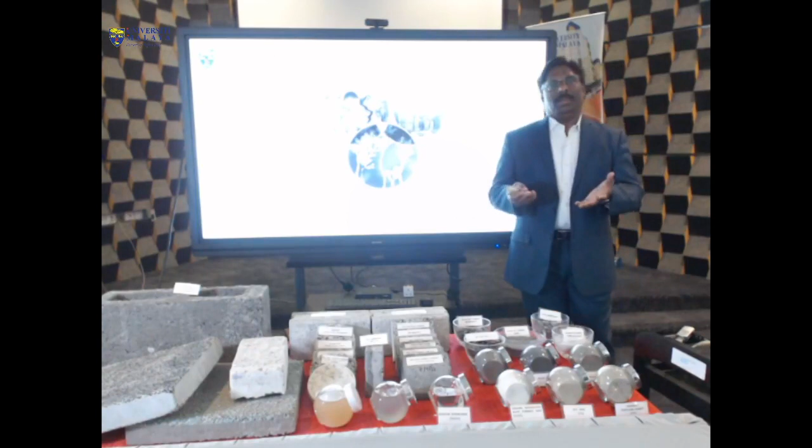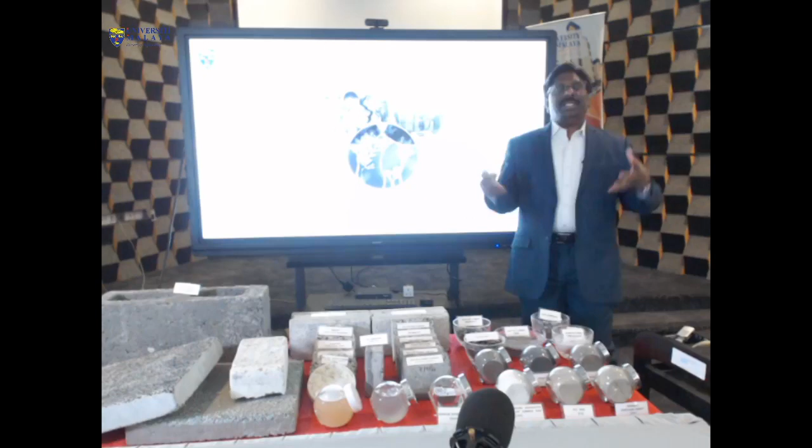Look at this, the theory by Elkington in 1988. He was encompassing all the three aspects of a sustainability tool: people, planet, and prosperity. Most of the NGOs are fighting for this to get accomplished in their projects. For example, when we focus on the prosperity, sometimes there is a possibility to lose the focus on people and the planet. Therefore, by balancing these three, people, prosperity, and the planet, we can achieve a sustainability tool that could balance the progress or growth.

Also, this slide shows, based on the United States of America's Green Building Council, that with 5% of world population in the USA, they consume nearly 30% of the world's energy, and also 60% of the world's electricity generated, with just less than 5% of the world's population. And also the potable water they use to flush the toilets every day is enough for the entire population to cater for drinking water. So when we look into the sustainability aspect, we see certain countries, developed countries, are in a different arena, whereas the developing and underdeveloped countries have to fight for survival.

That's why there is this body called LEED, Leadership in Energy and Environmental Design. In America, it's quite popular, and in some of the Western countries, for the certification of a building by a third party. In Malaysia, the Green Building Index, GBI, is given, and in Singapore and other countries, based on certain criteria that could promote the sustainability aspect. For example, energy is a very important aspect. In most of the buildings, we consume a lot of energy because of the air conditioning, lighting, and other aspects. So it is quite important for us to reduce the energy dependence on conventional sources. So how do we reduce the energy usage inside the building? That is given maximum points in the Green Building Index.

Second, water efficiency, also CO2 emission, and improved environmental air quality and stewardship towards sustaining that kind of aspect. Today's construction should not only be sufficient for another 10 or 20 years, but we need to cater for another 30, 40, 50, or 100 years, depending on the design of the building. So some of the aspects in Malaysia for the Green Building Index are similar to the LEED certification. We have energy efficiency, indoor environmental quality, EQ, sustainable site planning and management, and also material resources, water efficiency, and innovation. The points are listed. So based on this merit, they will give the certification to a particular building, whether it falls under the green building category or platinum or silver, etc. These are the requirements.

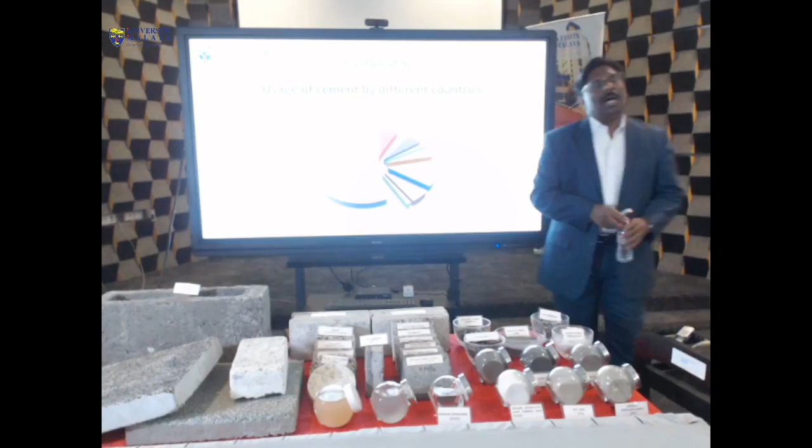Look at the cement consumption by different countries. If you look at this one, on the left side, we see the cement consumption by China and other countries. Supposing we compare China with India of equal population, we can see that 57% of cement is consumed by China, whereas only a fraction of that by India. So the population growth alone does not determine this expansion of development. It's two contrasting features between China and India. The growth is not stopping. You can look at this.

This was an article written by Bill Gates in the Washington Post some time back, based on US Geological Survey information. The cement consumption by the US was only 4.5 gigatons over a 100-year period. However, within the 3 years of 2011 to 2013, China consumed more than what the USA consumed over 100 years. So look at this next picture. This shows the development of one district in Shanghai from 1987 to 2013, how the vast development of infrastructure changed the whole landscape of this Shanghai district. Today, it's one of the most developed provinces in China.

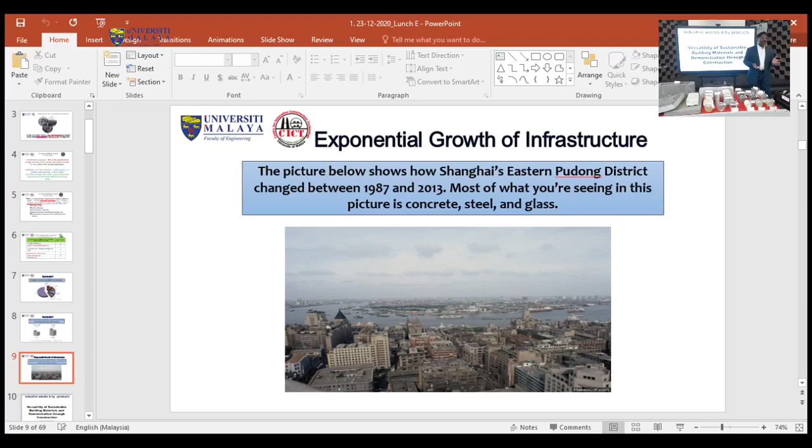So, as a researcher, what do we do in Malaysia? We do not want to confine our research inside the university, within the four walls. So our university management, led by our Vice Chancellor, Deputy Vice Chancellor Research, and Dean, Deputy Deans, are all emphasizing how to move this research forward to demonstrate to the public that these research projects can be implemented and can be useful to the public.

That's the reason that we have to demonstrate using the sustainable materials, how we can adapt, how we can implement, how we can use these sustainable materials for the sake of our population, for the betterment of our population. So these 3 or 4 projects that I'm going to show may demonstrate how we have used these materials for the application for the population of Malaysia.

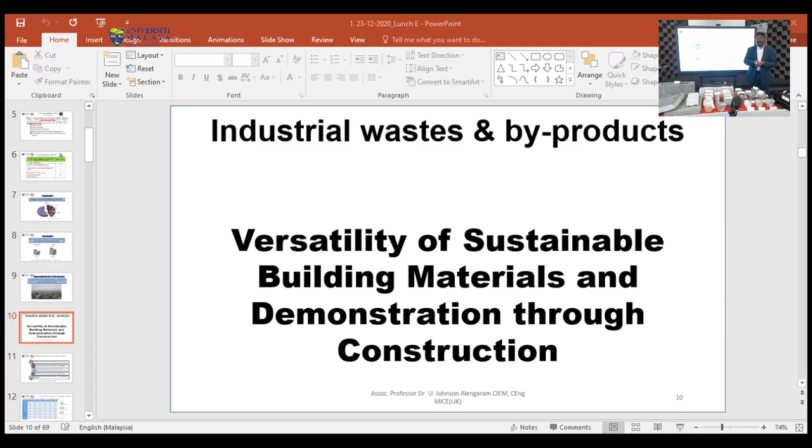For instance, the depletion of natural resources in Malaysia is alarming. It's important that we should preserve the natural materials for our future generation. The second point, the release of CO2 from the building industry is 5 to 7% because of the cement, especially the cement production. Also the rising cost of the building and weaker economy. And because of the population rise, millions of houses are required, not only in Malaysia, but Southeast Asia and Asia in general.

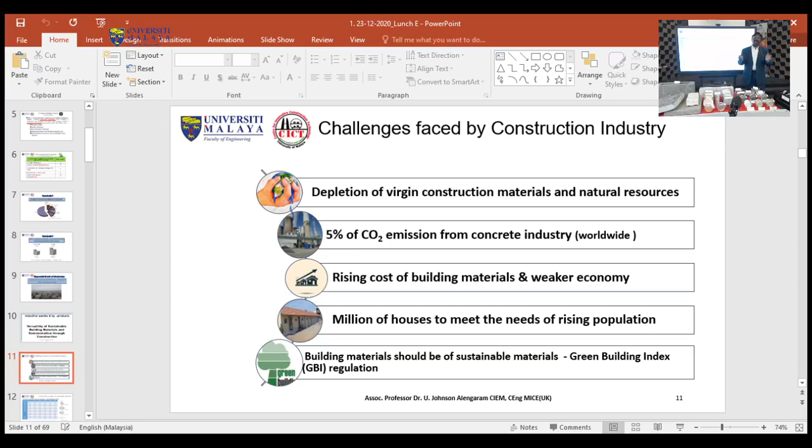And also there are requirements by various governments on green building index. So this pushes the researchers to move forward and find alternative materials, not the conventional natural resources. So in Malaysia, as you see here, there are many materials displayed here: bottom ash, fly ash, palm oil clinker ash, palm oil fuel ash, ground granulated blast furnace slag. These powders or ashes can be used as a replacement material. Not the whole replacement for cement, it's impossible in the near future, but maybe in a distant future we can think how to replace the conventional cement using some of these materials.

As Lao Tzu mentioned, the journey of 1,000 miles starts with a single step. So what do we do here? We start with a single step. We want to show that these kinds of industrial byproducts, some of these waste materials thrown in the vicinity of the industries, could be utilized as replacement or sustainable materials for the conventional materials.

So these powders that you see, they have silica, alumina, and iron oxide. These are the very important characteristics that can be emphasized to be used as cementitious or pozzolanic materials. So if you look at this, you can see three aspects for each of these materials. It's quite useful for us that we can use some of these materials.

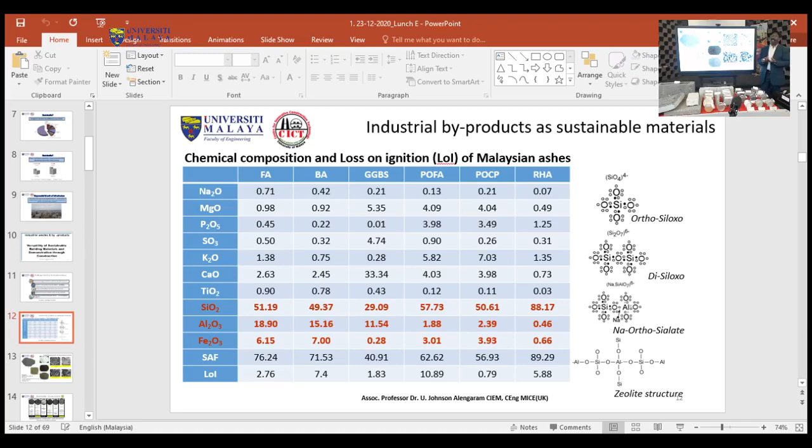Also the scanning electron microscope images show us the nature of these particles. Some of these particles are not similar to others, like for instance fly ash, which is widely used because of its spherical particle size and also its pozzolanic and cementitious properties. But other locally available materials such as locally available fly ash, ground granulated blast furnace slag, palm oil clinker ash, palm oil fuel ash, or bottom ash could be utilized in future based on the properties and also the durability aspect.

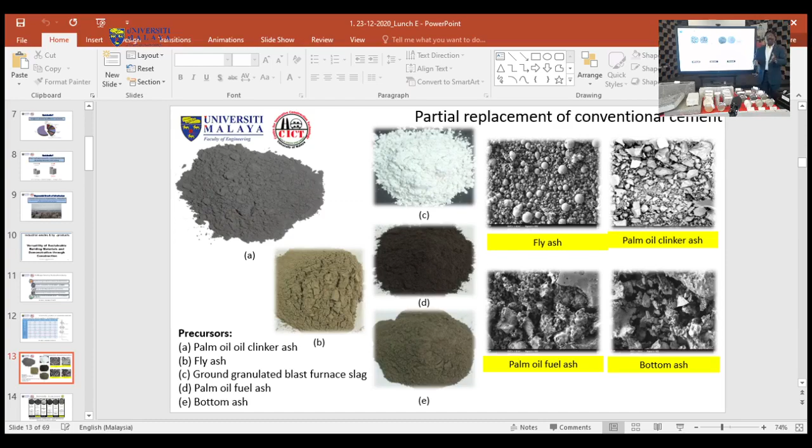That's important. And if you look at the availability of other materials, not only the cementitious or pozzolanic, we also have other materials such as slag aggregates from the steel industry. Nearly 1 million tons of these slag aggregates are produced in Malaysia. And also we have palm oil clinker aggregates, also nearly 1 million tons in Malaysia, with over 400 palm oil mills or factories all around Malaysia. We can use some of these materials which are sometimes thrown in the vicinity of the factories.

Also we have quarry dust, which is conventionally used for the road surfaces. But it can be centrifuged to remove the flaky and angular particles. This quarry dust can be used as a replacement of sand. So here in Malaysia, there is a factory that centrifuges this quarry dust to get rounded particles so that it can be used as sand, and it is christened as manufactured sand.

Apart from that, we also have other byproducts from the palm industry. That palm oil clinker can be used as powder because it has got cementitious property or infilling property, so that can be utilized. And also, while finding out these quantities or statistics, we can think of how we can move forward by utilizing these materials.

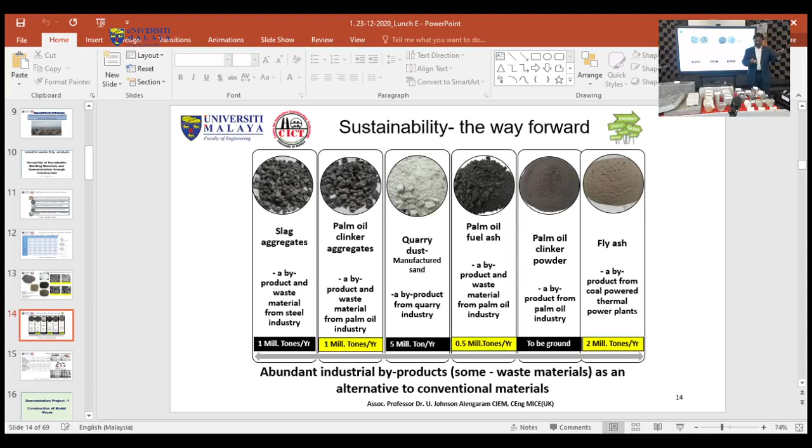And also the aggregates, when it comes to the fine or coarse aggregate, the properties are very important. If you look at the properties, for instance, the oil palm shell that we see here is not like conventional aggregate. It's quite different compared to the slag aggregates. We see here the slag aggregate. It has got a rough surface, which is very useful for the binding or bonding property with the matrix.

Also, we have palm oil clinker aggregates. These aggregates are very porous and very lightweight compared to the slag aggregates. This can be utilized because of the minute pores or bigger pores in this particle.

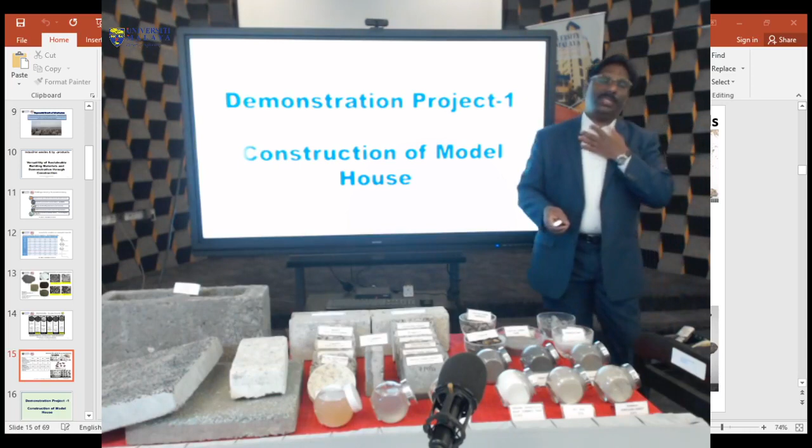This could be utilized for better bond between the matrix and the aggregates. So the properties are given here, and utilizing some of these materials, we have demonstrated one house constructed within the University of Malaya campus in the Faculty of Engineering. So that's what I'm going to show first as a demonstration project.

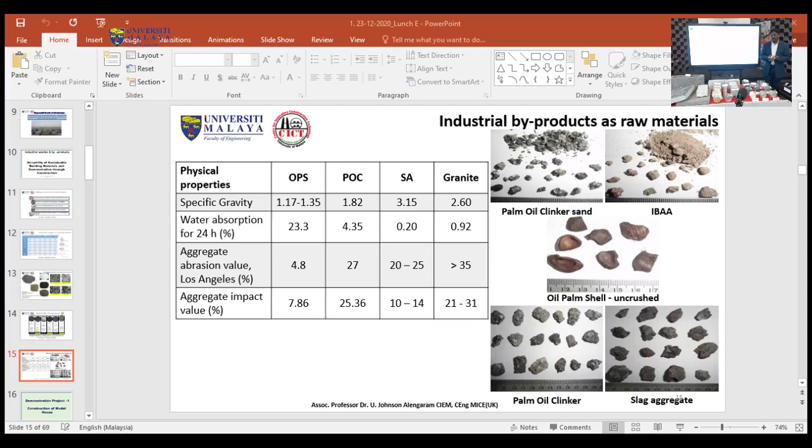In this project, we have utilized some of these local industrial byproducts and waste materials. For the replacement of batu, coarse aggregates, we have used palm oil clinker, oil palm shell, and the slag aggregate from the steel industry. And also, as a partial replacement of cement, we have used palm oil clinker ash, fly ash, palm oil fuel ash, and ground granulated blast furnace slag for the pavements.

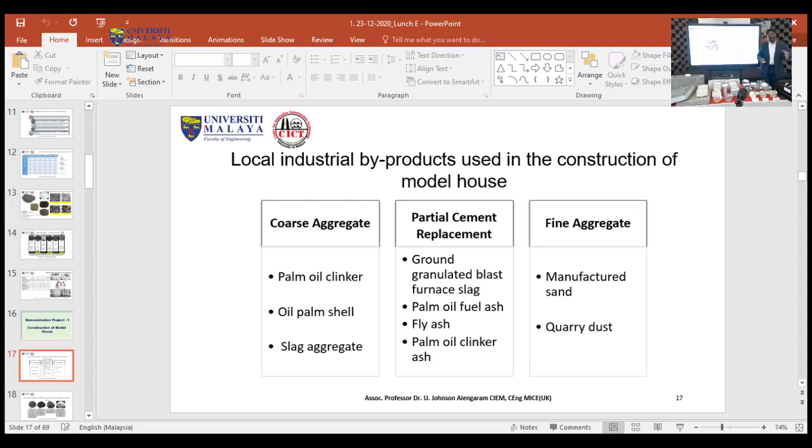And for the fine aggregates, we have used manufactured sand, which is, as I mentioned, processed from the quarry dust. And as I mentioned, these four binders have been used to replace the cement. And the oil palm shell aggregates we have used for the pavements. Slag aggregates and palm oil clinker aggregates have been used in the development of the bricks that are displayed here.

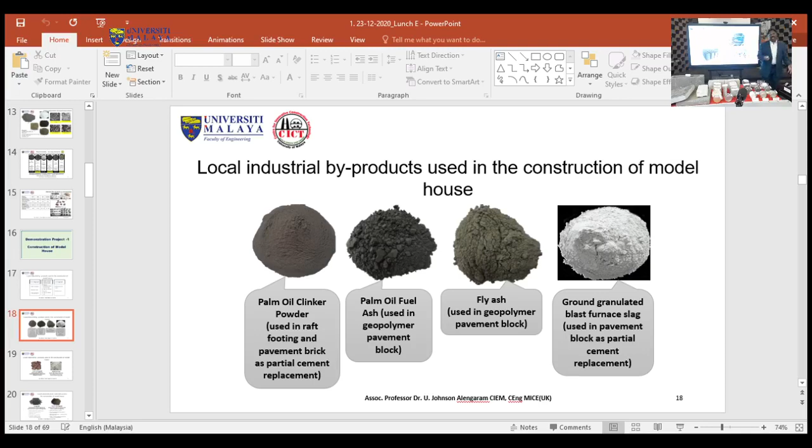And we have approached a company to manufacture or produce these bricks for us in the construction process. So CKYIBS was our industrial partner. They enabled us to produce or manufacture these bricks in the factory. So this is the process that you see.

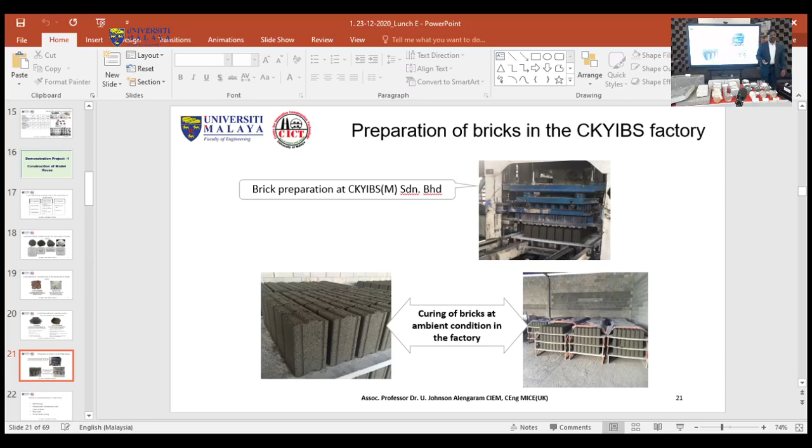And we have used a raft footing as this demonstration model house was being constructed on a car park area. We had to use a raft footing and reinforced U-brick beam and column blocks, brick wall and metal deck roofing. Very simple. It is considered as a low-cost model house. So this is the foundation, and the construction process, different phases of construction, and the walls and the column being built.

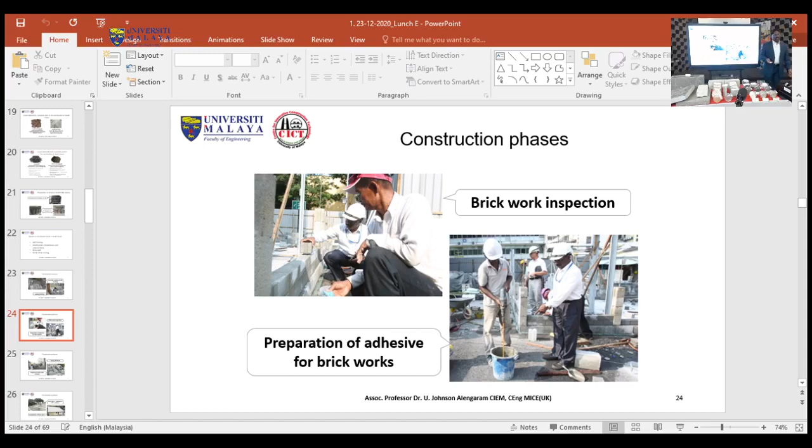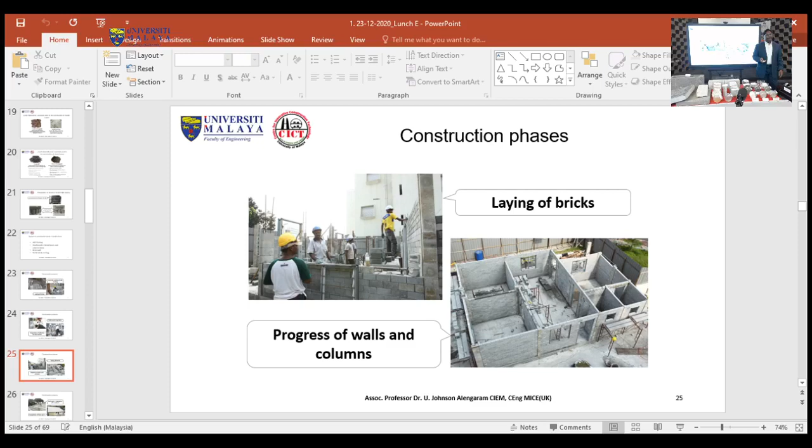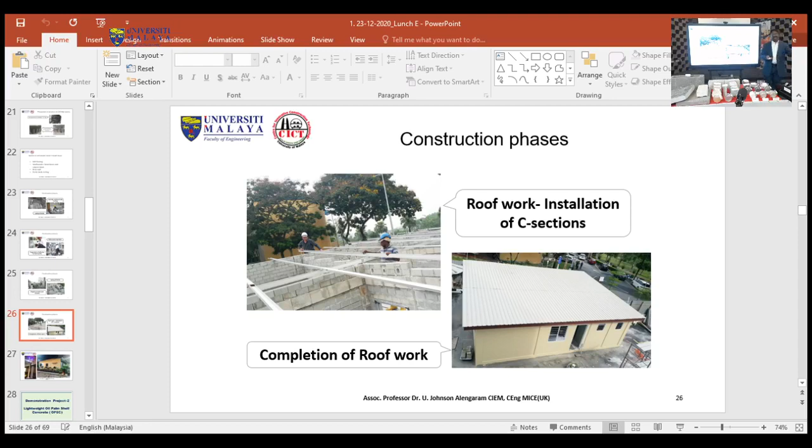And it is an 800 square feet demonstration model house, built in the vicinity of the Faculty of Engineering. And on the roof, because of the low-cost model, we have used metal deck roofing, as you can see there. And this is the completed house. It's being used for students and researchers, but also we have utilized this for STEM purposes in the past.

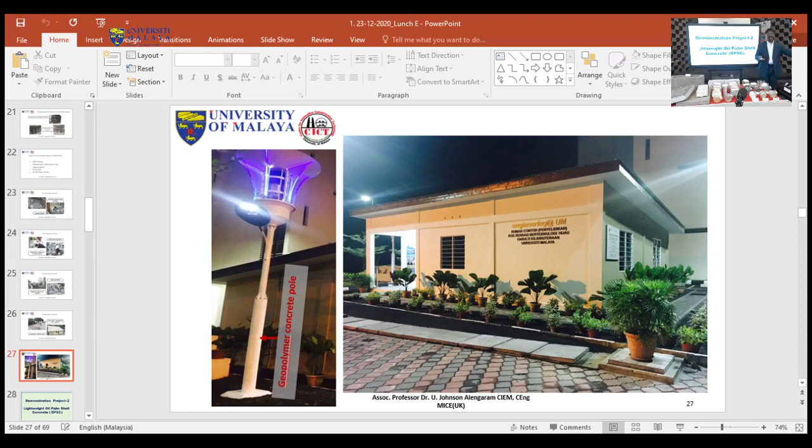And the second demonstration project is on the lightweight oil palm shell concrete. Even though this research is a little bit older, the need for the use of Malaysian industrial byproducts is still quite crucial. That's one of the reasons I'm showcasing this second project. This so-called waste, today it's not waste, but once it was. 30 years back, this material was just thrown away in the factories.

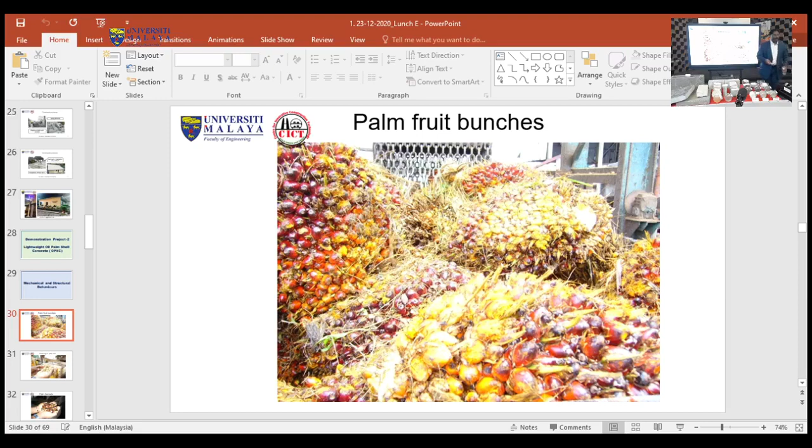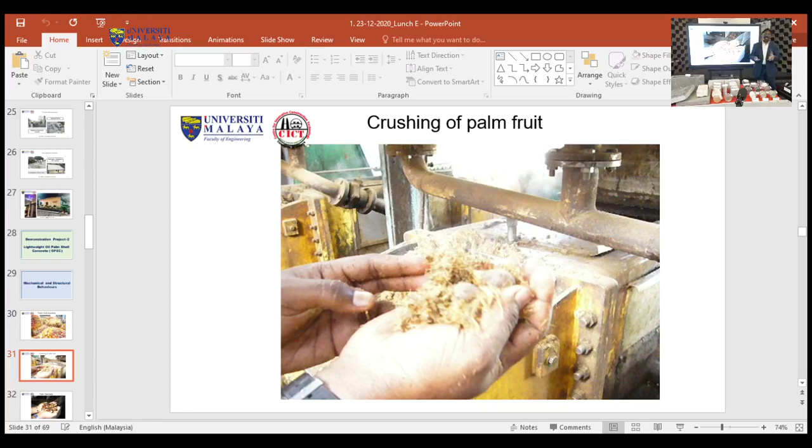So we have collected these shells, and these shells are not like the other coarse aggregates. Hence, we have to investigate the properties, because it has convex and concave surfaces, as you see there. It could bond with the matrix, cement or other material, but it will not be like the other conventional coarse aggregates. So we have produced normal weight concrete slabs and oil palm shell concrete slabs and beams. First, we investigated the beams. That's what I'm going to show.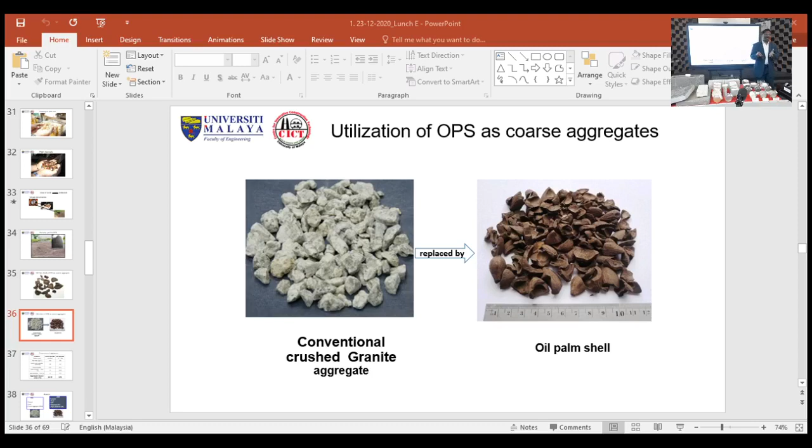And the properties you can see. The conventional aggregates have a bulk density of 1500 kg per meter cube, whereas this oil palm shell is less than half, 600 plus. At the same time, the bottom one, the aggregate impact value, was the key factor for us to investigate this further. When we hammer the conventional normal weight aggregates, the impact value is quite high, 16.78. Whereas when we hammer this oil palm shell, which has a lot of fibers inside, it doesn't crumble, but rather it has energy absorption characteristics.

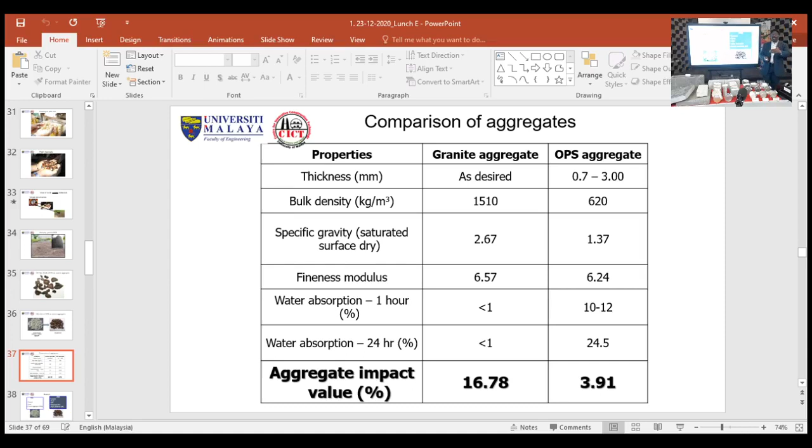So that's what enabled us to move forward to investigate this shell as a replacement for the conventional normal weight aggregate concrete. We have utilized conventional normal weight aggregates in normal weight concrete, and oil palm shell in this. However, we used an additional cementitious pozzolanic material, silica fume. I'll tell you the reason later. So the density of the normal weight concrete is 2300, whereas for the lightweight oil palm shell concrete it's about 1800.

There you can see the difference of almost 20% reduction in the density. It's lightweight concrete, less than 2000 kg per meter cube. Then the workability is quite acceptable, and the compressive strength, cube compressive strength, was almost identical. It's in the range of 30, and we can see the flexural as well as the modulus of elasticity.

The modulus of elasticity is a key indicator of its ductile or brittle nature. For instance, this concrete, even though the compressive strength is quite similar, its modulus of elasticity, Young's modulus, is quite contrasting. The normal weight concrete is around 26 or 27, whereas for this it's only 12 gigapascal. So I'll explain that aspect later.

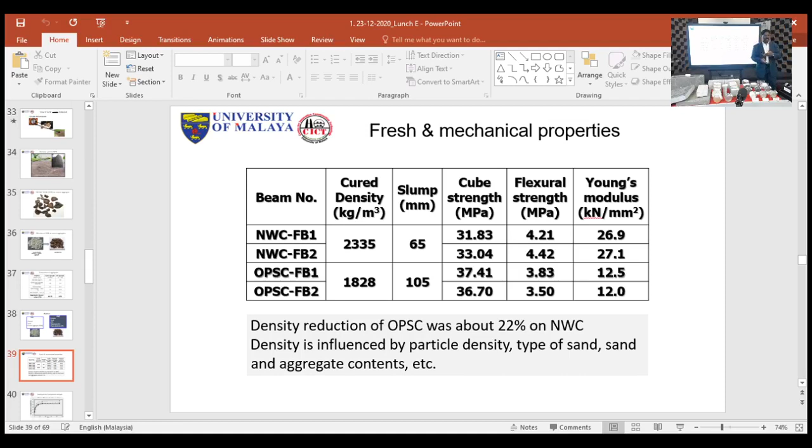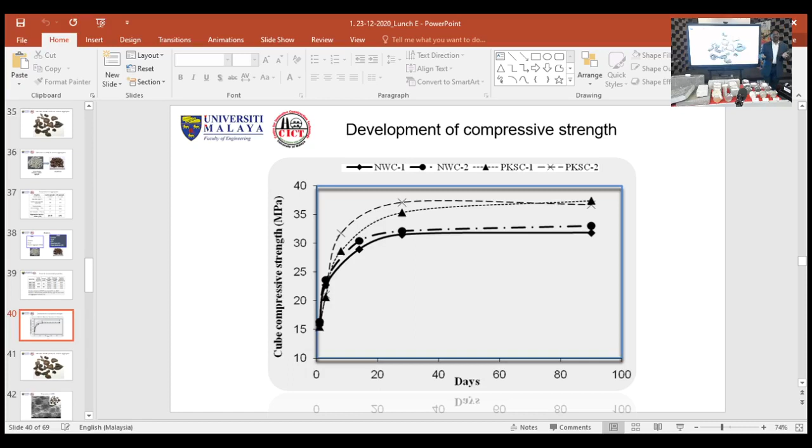And as I explained before, how do we enhance the bond? Because the shell has convex and concave surfaces, it's not easy for us to get it bonded inside the cement mortar. So because of these convex and concave surfaces, we have to investigate the surface. For instance, this convex surface has numerous pores which are less than 20 to 30 micrometer in size. You can't see them with the naked eye.

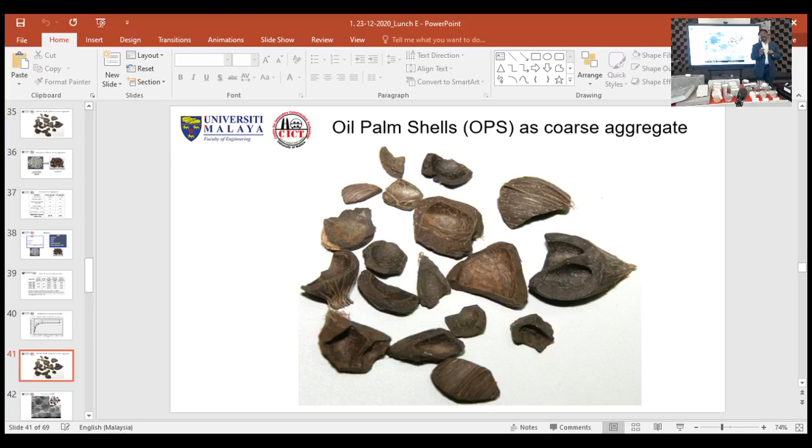But when we look at the microscope images, we identified this surface has a lot of minute pores, which led us to see how we can improve, because this cannot be bonded with the matrix properly. So this surface is one of the weakest surfaces. Unlike the concave surface or the broken surface, which has an undulated surface. These undulations have the ability to have some kind of bond, whereas this convex surface has the weakness in the bond.

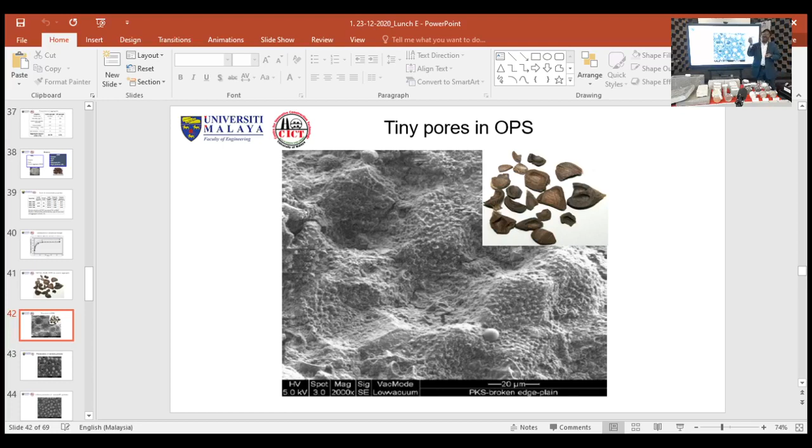So what did we do? We tried to use only the plain cement, and we found out that for all the pores that you see here on the screen, the same surface as in my hand, less than 20 or 30 micrometer, the cement particles are bigger compared to silica fume, so they cannot infiltrate. You see that there are voids.

Whereas if you look into the next image, when we added the silica fume with the cement, most of the pores within the concave and convex surface were already filled with the mortar, the so-called binding particles of silica fume, because silica fume is very fine, 100 times finer than the cement particles. So that led us to the next stage of fabricating the beams.

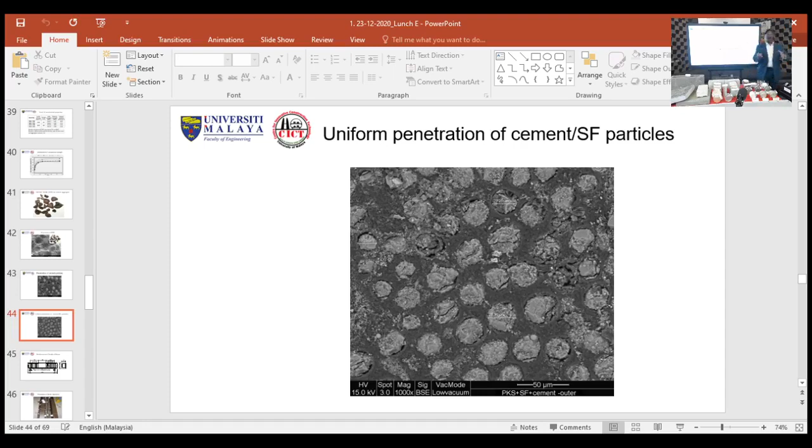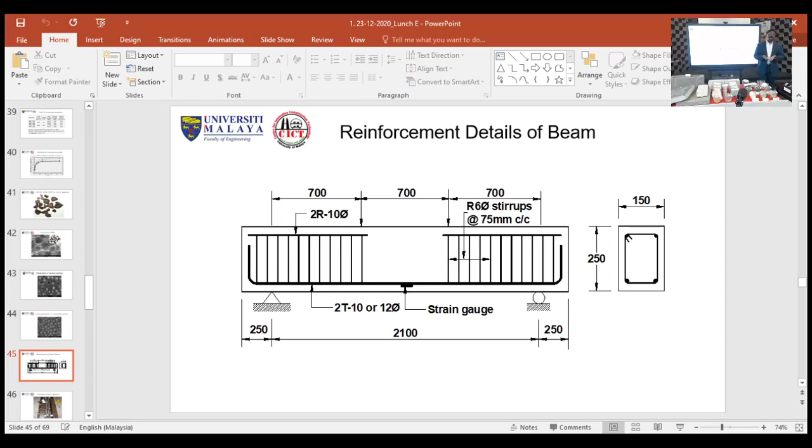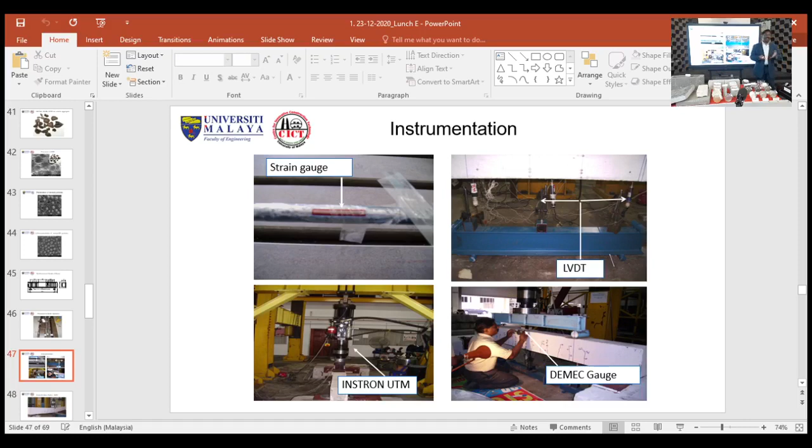What you see is the conventional reinforced concrete beams of 150 by 250 mm size, and we have investigated these with strain measurements, deflection measurement, and the load capacity, bending moment capacity. So this is the fabrication of the beam with the strain gauges and the DEMEC gauges. All these were placed, and an LVDT was used to measure the vertical deformation. This is the instrumentation that you see.

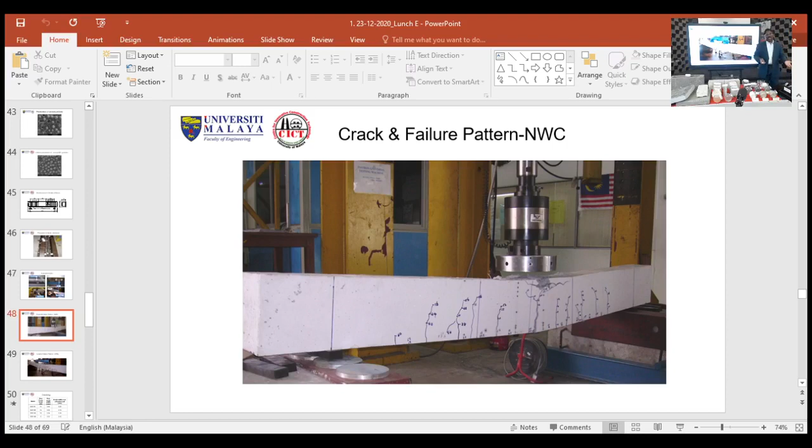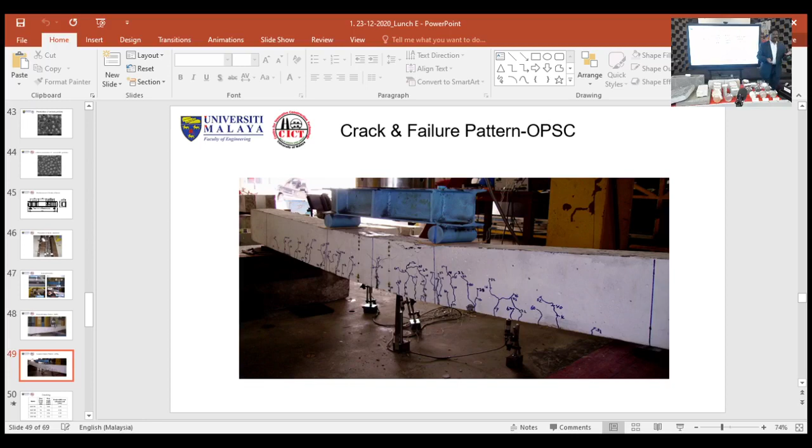So this led us to understand that this has a lot of ductility. It has a ductile ability to absorb the load, and you can see the crack width in the normal weight concrete is 0.66 at the ultimate load, whereas in the lightweight, because the number of cracks is more, the width of the crack is less. So that's what we see here.

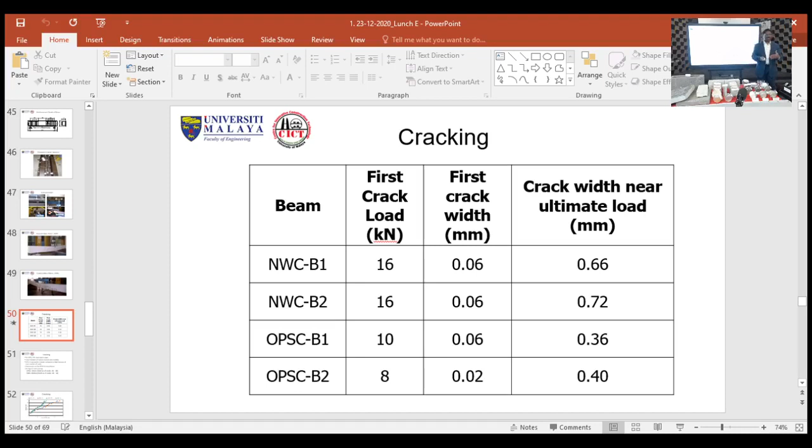We tested two identical beams to compare the structural performance. The total number of cracks in the normal weight concrete is only around 10 to 11, whereas in the oil palm shell concrete beam it was more than 25, around 30 cracks. The more the number of cracks, it shows the bond and the ductility of the beam. And we can see the development of the cracks over the loads and moment, and also the deflection criteria.

As I mentioned, a high ductility ratio of about 5 for the oil palm shell concrete beam compared to 2.6 for the normal weight concrete enabled us to understand that this material has ductility characteristics. Also, we can use this kind of oil palm shell concrete in earthquake prone regions, because the failure of this type of concrete is not catastrophic. It's not brittle failure. Because of this ductility, the failure mode is ductile.

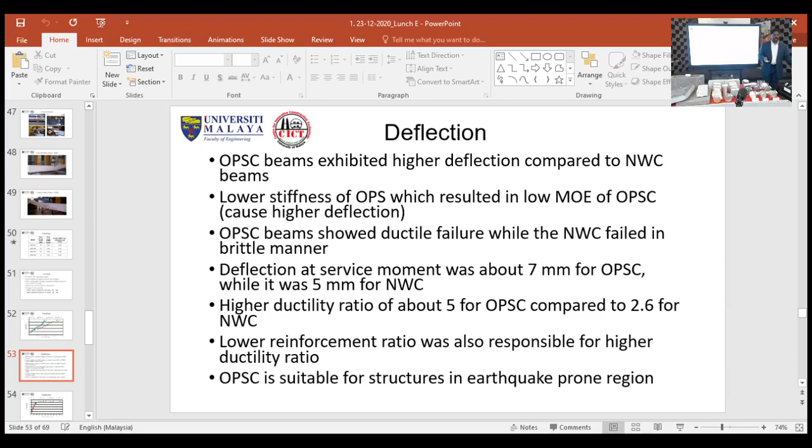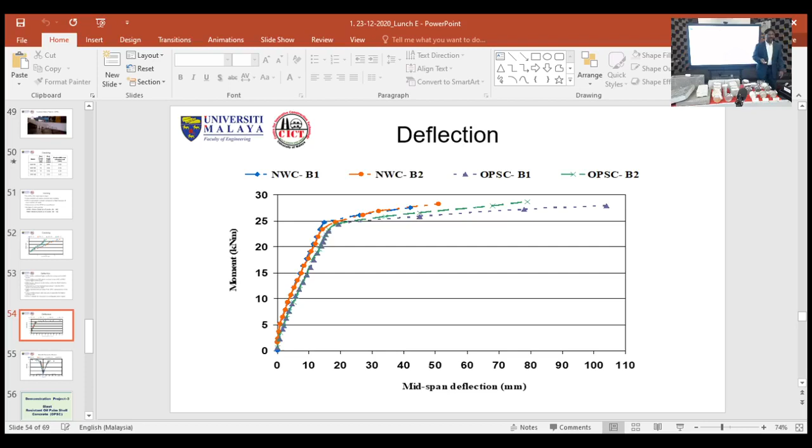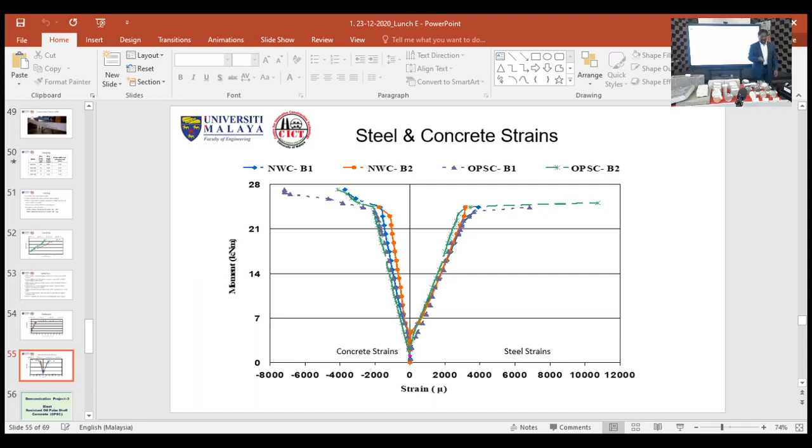And this is the deformation. We can see that the deflection for the normal weight concrete beam is around 40 or 50 mm, but for the lightweight concrete, the deflection was about 100 mm. And the strain characteristics also, we compared the strains of both normal weight and lightweight concrete. Because of the bond and because of this deformation, the strain was much higher compared to the normal weight concrete. This led us to the next stage as a pinnacle of our research on this oil palm shell.

Where do these findings lead us to? The next stage of our project was investigating whether, because of this ductility, because of the aggregate impact value, we can use this as an impact and blast resistant concrete. So we did it for impact and also the blast resistant concrete. So what you see here is the blast resistant concrete.

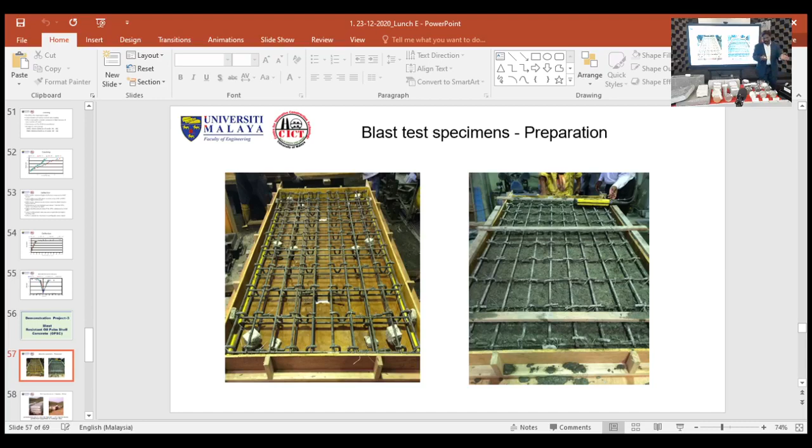We have demonstrated, you see the slabs that are being fabricated. The slabs are there, the normal weight concrete as well as the lightweight concrete. And these slabs from Port Klang have been shipped to Huludao in China through Tianjin Port in China. And we had good collaborators in the form of University of Adelaide in Australia, University of Melbourne in Australia, and Beijing Institute of Technology in Beijing, China.

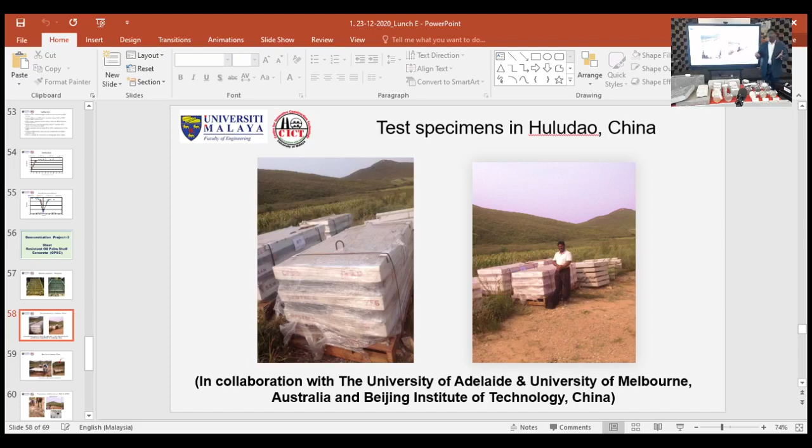So with these collaborators and researchers from University of Malaya, we have demonstrated that these oil palm shell concrete slabs are capable of resisting blasts. We can see here the testing arrangement in a military site in Huludao, China. And because of the sensitivity of the materials involved, because we are using explosives of 5 kg TNT, 10 kg TNT, we had to utilize the military experts.

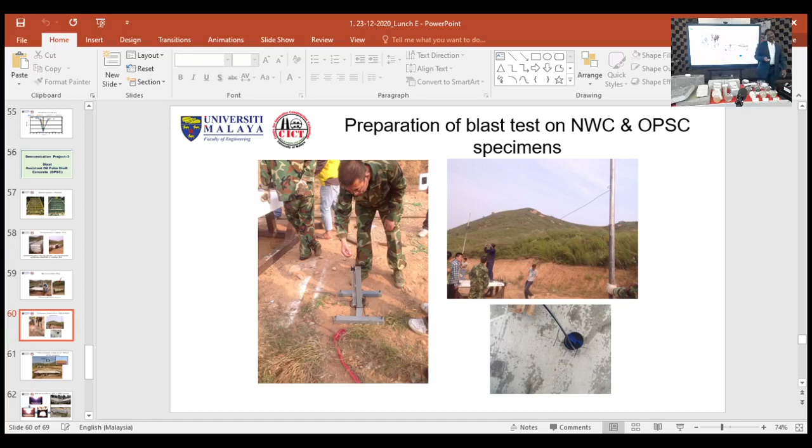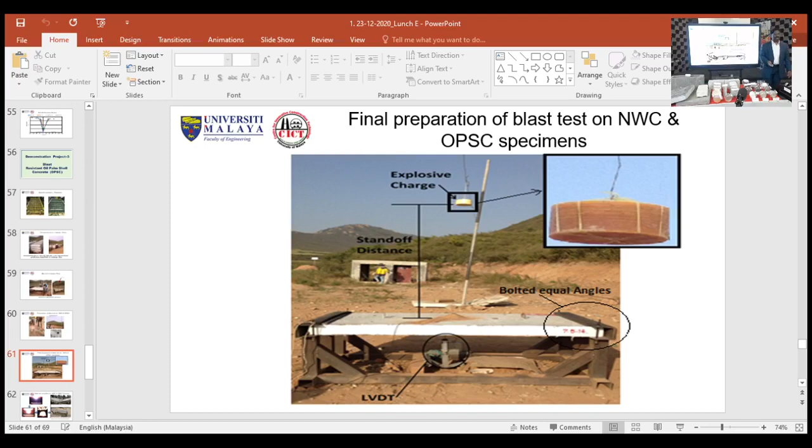The professor from the Beijing Institute of Technology, who is an expert in handling the explosives, is setting up the testing arrangement, and the team from the Beijing Institute of Technology and also from the University of Adelaide in Australia came and helped us. And you can see that the standoff distance between the blast panel, the oil palm shell or normal weight concrete panel, and the explosive is only 1.5 meters. The standoff distance is quite important. The impact or the pressure waves depend on the standoff distance. So the standoff distance is quite close, 1.5 meters, and you can see the contrasting features of these two slabs.

On the left hand side, we see the initiation of the blast through remote. Then the blast is accompanied by fire. There's pressure and a lot of impact on the slab. So there's impact, there's pressure, and there's fire. The slabs have to withstand all these three. And you see on the right side, on the top, the normal weight concrete had shattered upon the impact of the blast. After the ignition of the explosives, the slab was shattered, and there are a lot of shrapnels that you can see.

The shrapnels are the ones that cause damage to the building and injuries to the people, even kill people. On the other hand, we can see on this oil palm shell concrete, after the blast, these two contrasting features. After the blast, impact, pressure, and the fire, the oil palm shell concrete was intact. I would say that there are numerous cracks on the surface, on the bottom. However, there is no single shrapnel compared to the normal weight conventional concrete. Almost equal strength concrete, but because of the energy absorbing, impact absorbing characteristics of oil palm shell, this has happened.

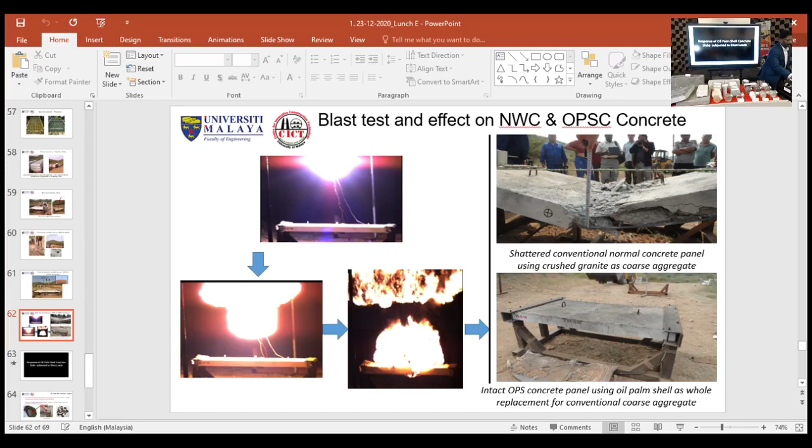The next video, a short 20-second video, showcases how the blast wave initiated. We'll show the short 20-second video.

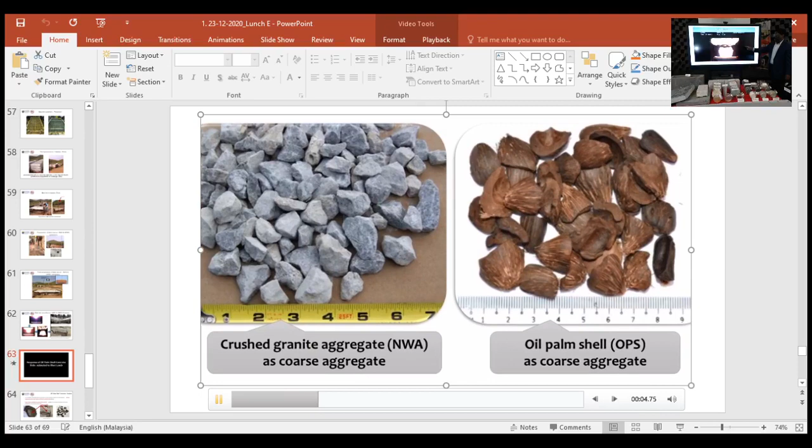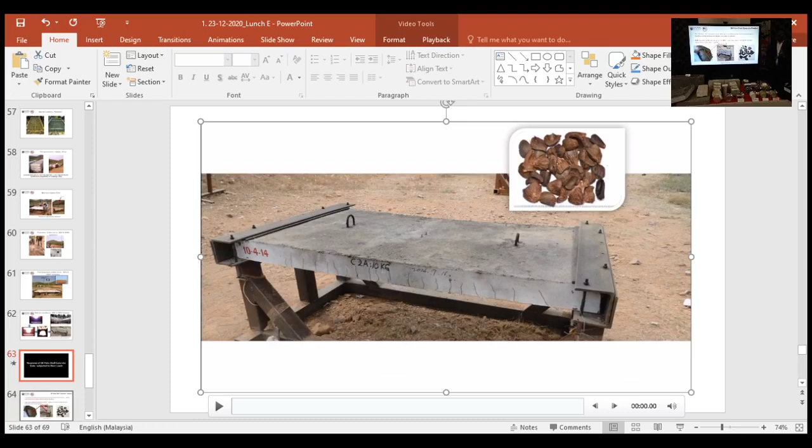And what we see here is the simple explanation that oil palm shell concrete is a kind of method. We can use it as an innovative idea or method to produce lightweight panels or lightweight slabs, and the fibers in the shell enable them to absorb the energy, and it can be useful in impact or blast resistant concrete.

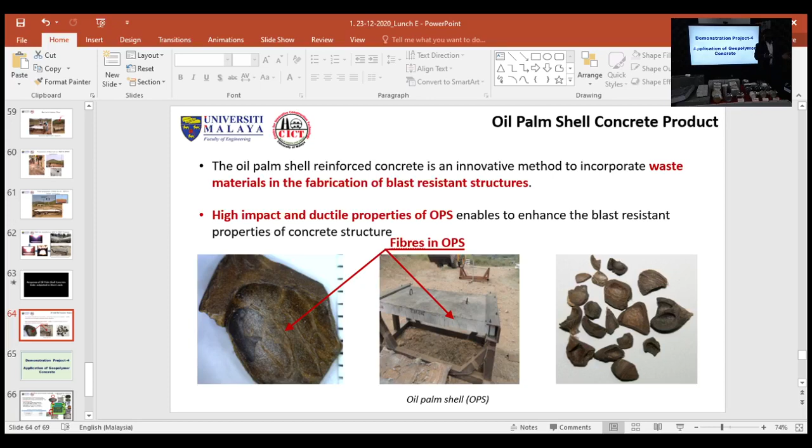And finally, before I close, I would like to also show a simple project that we have done using some of these materials here. We have utilized in this project the palm oil clinker as a coarse aggregate, and we have utilized manufactured sand as a sand replacement for 100%, and we have used slag aggregates.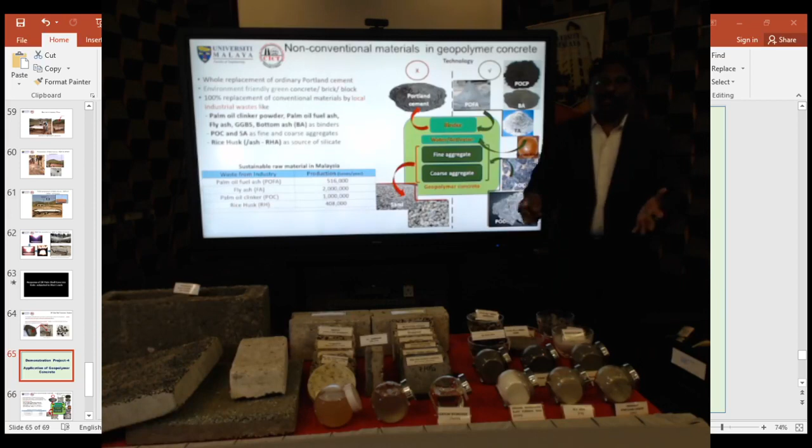So what do we do here? Replace the cement wholly, 100%. We don't want to use ordinary Portland cement. So we need other alternative materials. As I mentioned in the beginning, fly ash is one of the sustainable materials we have been using, and we have ground granulated blast furnace slag, simply called slag. We have palm oil fuel ash, palm oil clinker powder, and also bottom ash. In addition, we have metakaolin, which we can also utilize.

In addition, there are some other materials coming into the research market. We can utilize some of these materials and showcase to the world that these materials are quite handy, useful and durable. Upon investigation, we found out that these binders can be utilized as cement replacement.

The other aspect of geopolymer concrete is why it is not conventionally used: because of the cost. It's not in the market like conventional concrete, and it's not always easy to get the chemicals, sodium silicate and sodium hydroxide. However, sodium silicate can be produced using indigenous materials. Here we are using conventional commercial sodium silicate and sodium hydroxide, but there are alternatives available for producing sodium silicate.

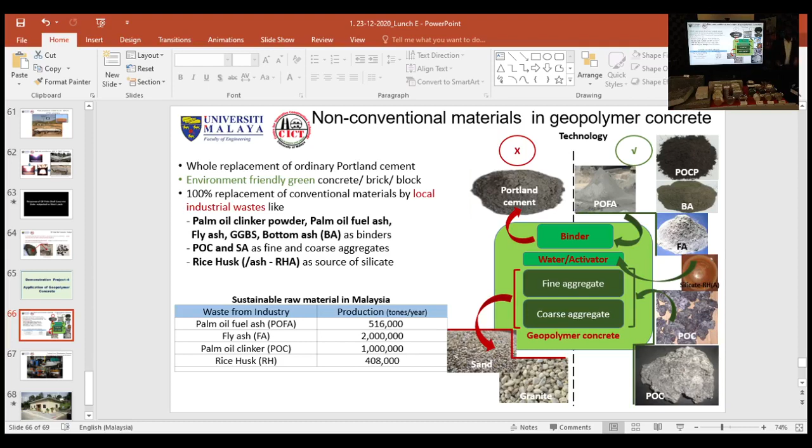The aggregates shown here, the palm oil clinker, palm oil clinker powder, fuel ash, clinker ash, and the slag aggregates, are alternatives to the conventional aggregates and materials. Here you see the structural performance. We have investigated the concrete's structural performance, and it's quite achievable. We can get high strength, medium strength, or low strength concrete depending on the binder content and the mix design.

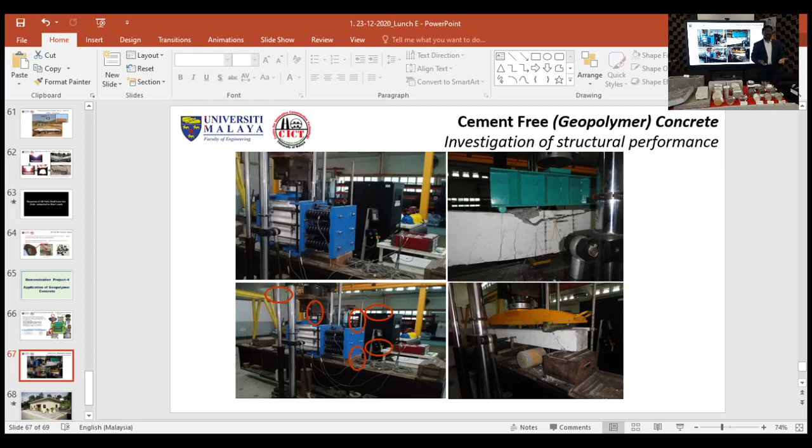You can see the shear resistance and flexural resistance have been investigated, and we have found that this concrete is at par with conventional concrete. However, how to demonstrate this? We have used this material to construct a house which is being used by bus drivers at the University of Malaya and also researchers. So this is the outcome of our research. The pinnacle of all our research should have some kind of outcome.

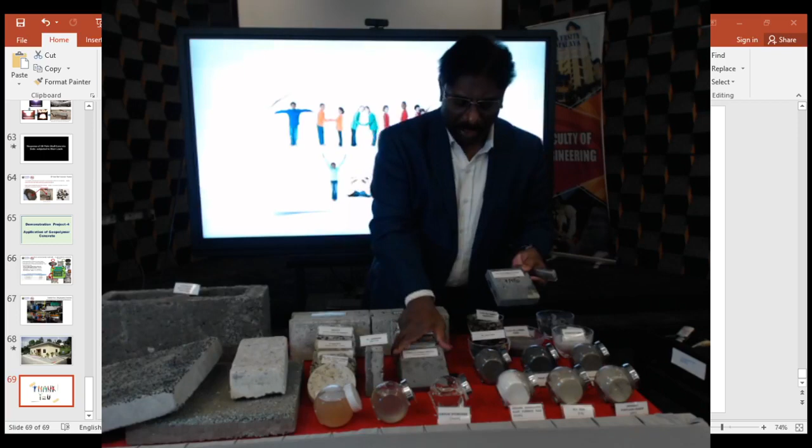So this is one of the outcomes of the geopolymer concrete, and with that I'd like to also showcase some of the materials displayed here. We have lightweight panels, lightweight materials, foam concrete, different kinds of lightweight foamed panels, and oil palm shell concrete. Even though its water absorption is high, we have means to preserve it through different kinds of coating.

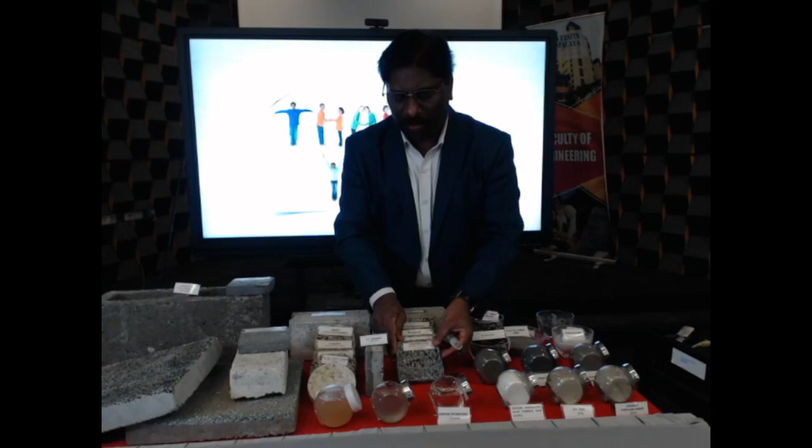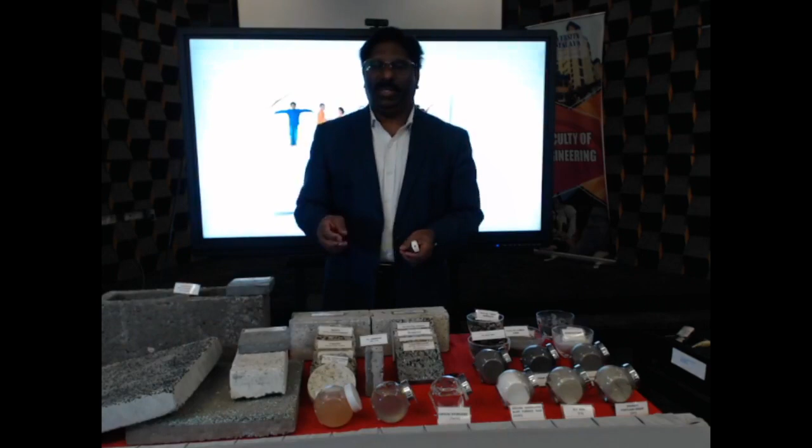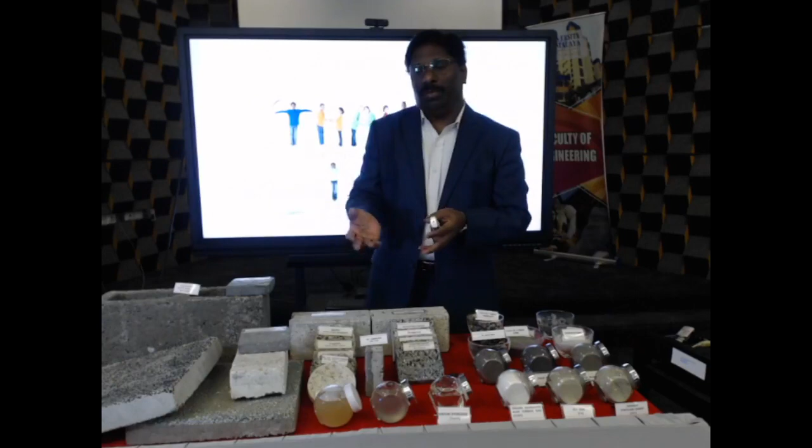We can see the blocks displayed here. These blocks are made from slag aggregate as well as palm oil clinker aggregates. We also have the panels demonstrated here, small blocks made of plastic aggregates. We used plastic aggregate in the geopolymer concrete demonstration house to showcase that plastics, which are not conducive in the current world because of pollution, can be utilized for some civil engineering applications.